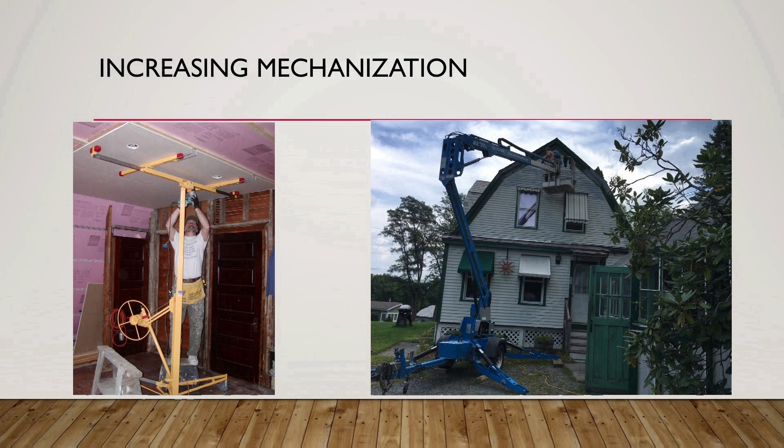And then, a couple years ago, I used a lift for the first time, right? Totally changes the way you work. No more setting up boxes, no more ladders, no more pump staging. You know, when you get up on a lift like that, you can have your entire shop up there with you. And it's just amazing. And this is common. It used to be pretty rare to see lifts on job sites, but it's mechanization. But that's not really what we're talking about, because we're not talking about today or tomorrow.

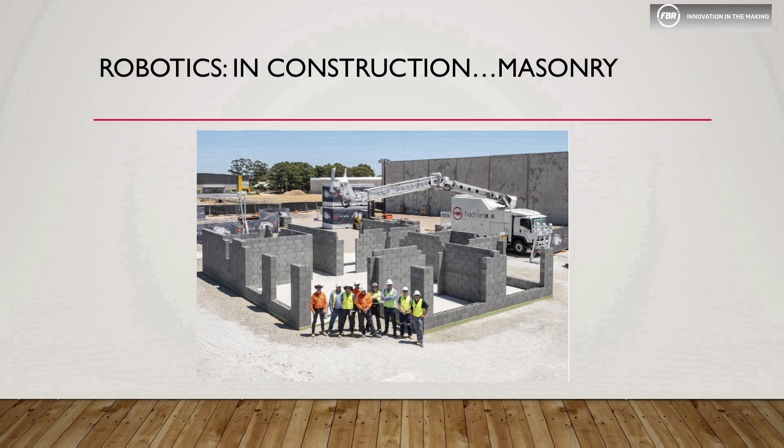We're talking about 2039. So this is a company out of Perth, Australia, FBR. They started in 1994 to work on how to lay any type of masonry with a computer. And their latest version is this one here, Hadrian X, which does just that. And it is Perth, Australia. Like, what the hell does it have to do with us here in New England? But there's a particular reason why they've been working on this since 1994, which we'll get to in just a moment. But it's highly mechanized and can lay out an entire building strictly from robotics, which are mechanical systems driven by computers.

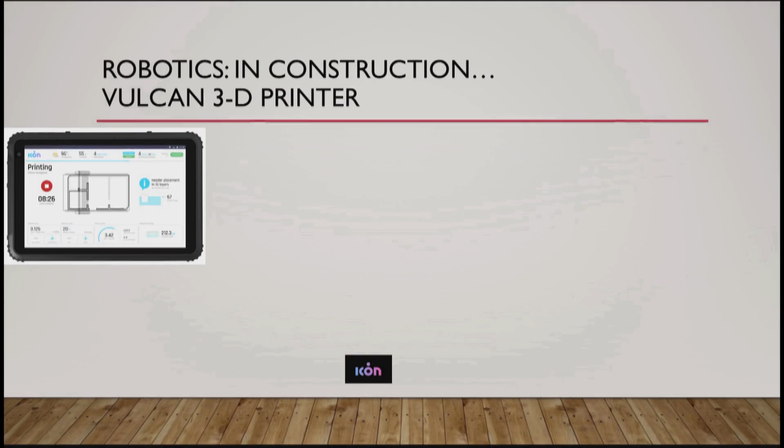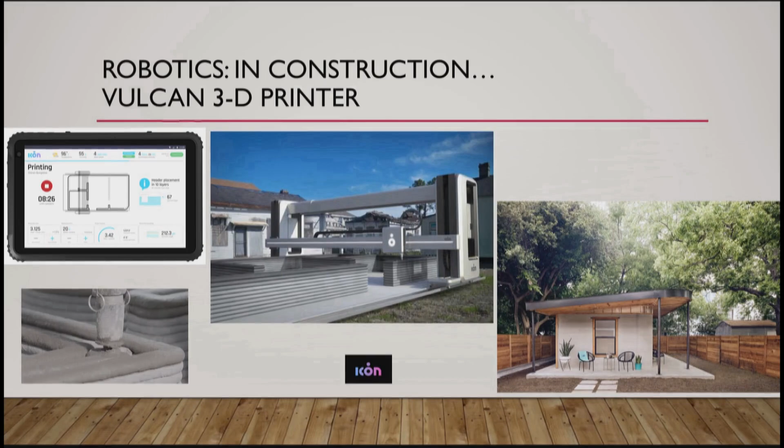So robotics also can involve a 3D printer. So I don't know if you're familiar with this company, Icon, but that's an iPad driving a 3D printer for a cement slurry. You can say, holy crap, where are they going to build that? Well, it turns out that's Austin, Texas. And that was the first permitted home built with a 3D printer. Now, we could have a lot of discussion about the building science of these types of construction, and we will, but in milder climates, these systems are taking hold.

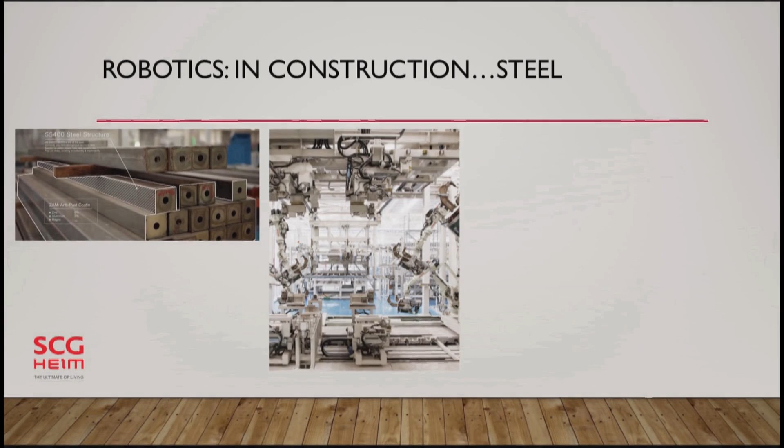So we got concrete and masonry blocks. What about in steel? Well, this company, SCG Heim, uses structural steel with this type of an assembly system, an awful lot like an automobile, and they build homes that look like this. This is in central Thailand. Also probably not terribly relevant to New England, but totally driven by robots, and there's a reason for this.

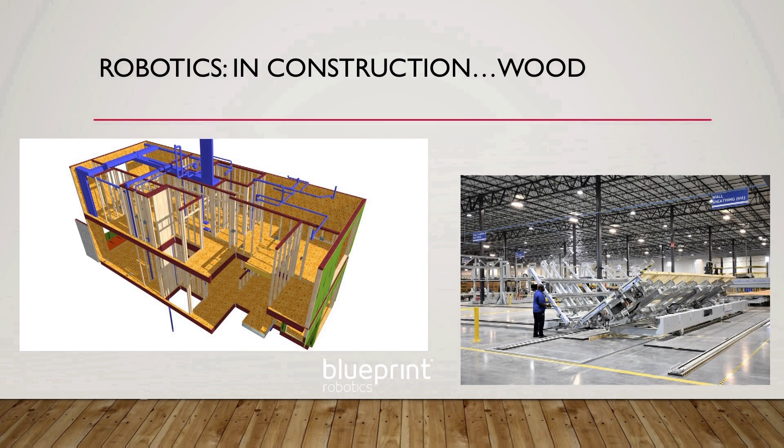A little bit closer to home, how many people are familiar with Blueprint? So this is a company out of Baltimore, and you send them your plans or your architect's plans, and they drive it through their factory process and deliver a final product to the job site that's sort of panelized. You have a highly trained crew build it, but then they come back at the end to basically wire and plumb the entire house. So they're involved really substantially at the beginning of the process in a giant factory in Baltimore, but then they come back and complete the process with quality driving this.

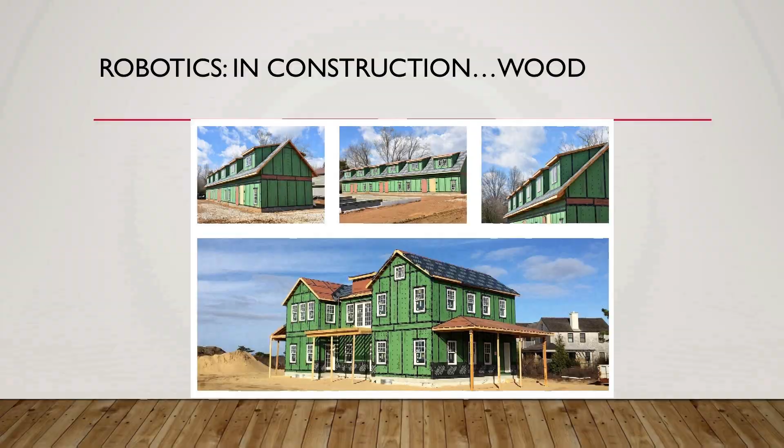This is all about what can happen in a factory as compared to what happens on job sites. And I'm showing this slide because when you go to projects on their website, they're all ZIP projects. So that's kind of interesting because as a system-built company, they went looking for a system-built exterior wall system. Now, full disclosure, I do a lot of work for Huber. And so I called them and I said, hey, you guys are involved with Blueprint. And there was some hesitation.

They said, yeah, but one of the advantages of a plant like ours that does continuous board generation is we can cut them to any length we want. The problem is that if the plans don't come from within Blueprint, but they're coming from people and architects all over the place, they're not modularized plans, right? So they're asking Huber for all these incredibly esoteric lengths, which sort of defeats the whole purpose of being in a factory, right?

So we have had modular and panelized homes for over 50 years, right? In central Pennsylvania, there have been companies doing modular, and one of the big problems is how do you create something that's modular but also has a custom feel to it? And I think there's an inherent problem with people who are used to site-built construction driving the decision-making process about how to move to robotic systems or to modular.

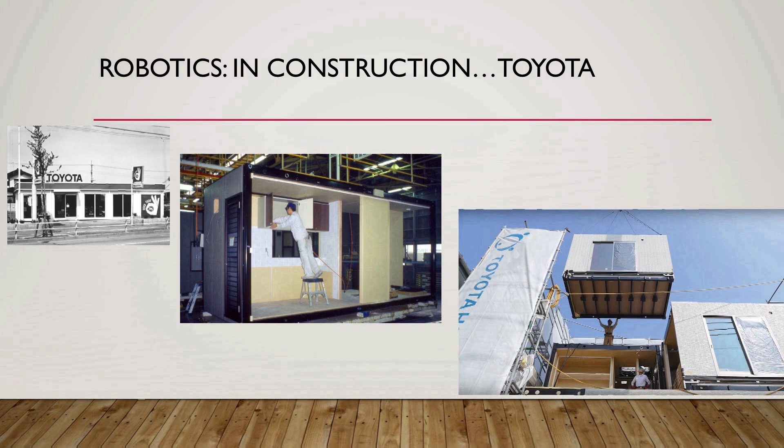So that brings us to the next thing, which is, well, wait a minute. Are there people who really know how to do factory production that are involved in home building? Well, Toyota has been building homes since 1975. In fact, some of their first locations in the US that sold homes, they sold them out of their automobile showrooms, right? Apparently not terribly successfully, but they know how to drive a process where you modularize everything, right? You create systems within a factory that give you the units you need, and then you plop them together. And again, we can have a discussion about the building science here, but this is where we're moving, and there's got to be a driver for it.

Honda builds homes in the US. They're taking a slightly different approach. This is Davis, California. Anybody familiar with the Honda Smart Home? And they're sort of going the opposite way of Toyota. They're taking their system of production and trying to figure out how to fit it with site-built construction. So it's sort of the reverse approach that Toyota is taking. And here's the house that they've built.

Tons of research. I have a little bit of a question here about their architect and the water management right about there. And these pop-outs are also sort of willy-nilly. I'm not an architect, but I expected Steve to jump out of his skin when he saw these. But the other big thing is the battery systems in cars we know are going to be connected to the battery systems in the house, and we're going to have this connection between the battery systems and the vehicle and the home in a way we've never had before.

And there's a guy named Michael Koenig. I don't know if any of you know his name, but he's the head honcho at Honda Smart Home. And he's been at Joe Lstiburek's summer camp. He's been working really hard to try to figure out how to move these buildings from climate to climate. Because that's the other thing, is you can move cars from climate to climate.

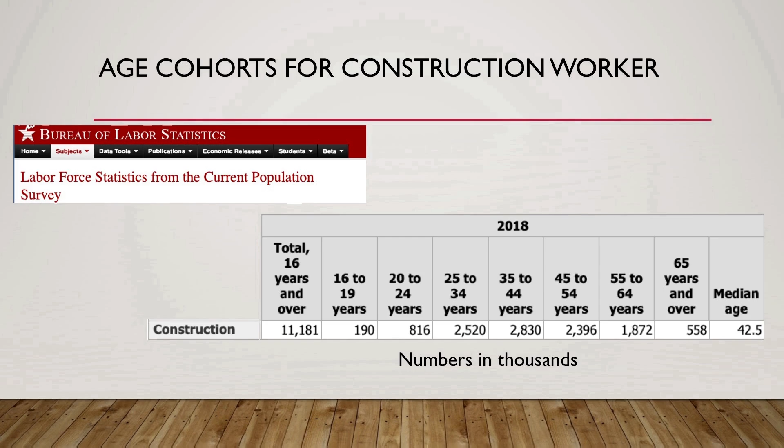The median age across all construction is 42.5. That is a recipe for robotics, right? Because that's how we're going to get them built. This is from NAHB, Eye on Housing. These are different construction trades. This is the median age.

Electricians, 40. Masons, 41. Plumbers, 42. Carpenters, 42. Site supers, 47. And inspectors, it doesn't matter if it's a building inspector or any type of inspector, 52. And nothing coming up in the pipeline.

Here's the real tragedy, is that even in the high-paying trade jobs on the commercial side of our business, we don't have anybody going into those programs. All the kids are going into college because that's where they think the money is. So this fellow right here, who is kind of the focus of this article, he is making $62,000 a year while he goes to school to raise his income up to $82,000 a year.

And yet we don't have people entering the trades, even when they're going to get paid that kind of money. So there's a huge disconnect between the labor that we need and the people that are going into the trades, even when we have really good pay. So that's what's driving this, is that everybody's going to be moving to mechanization because we got to figure out a different way to do it. People aren't interested in coming into the trades, at least not in the numbers that we need.

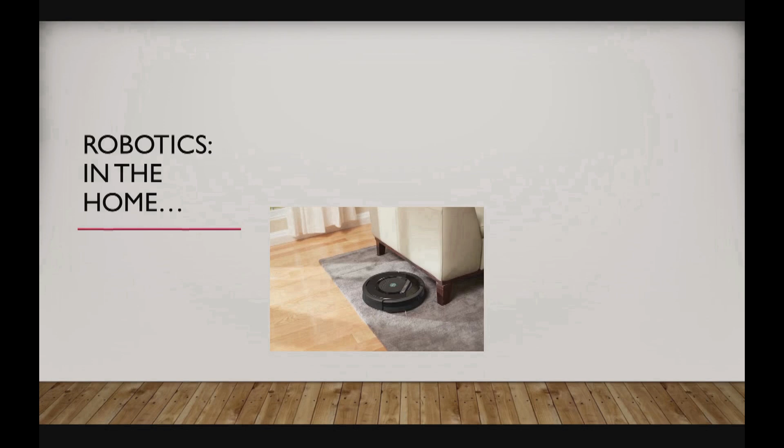So this is not a big surprise to you. We have all these robotics that are developing inside the home. This is the Roomba, right, which is the vacuum cleaner. This is called Leka. Leka is an interactive computer robot for autistic children. This is Home Patrol. So this unit is connected to your smartphone. So the camera moves based on how you direct it from wherever you are. So it's a moving security system.

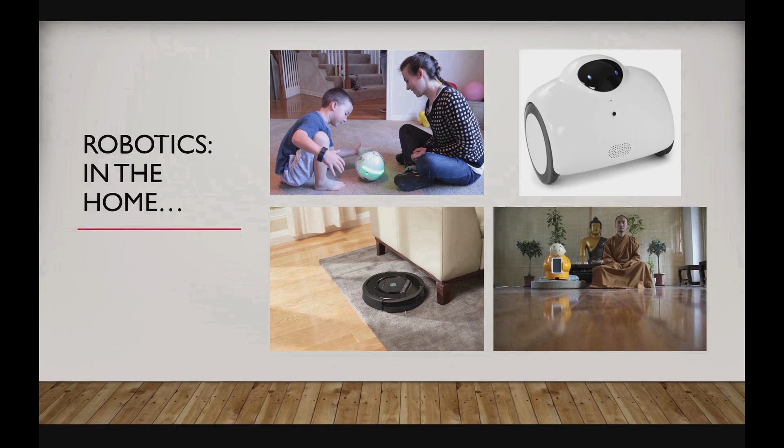This is my personal favorite. This is Xian'er, and Xian'er is a spiritual advisor who is a robot. I don't know what these people are drinking, but it's better than what we have.

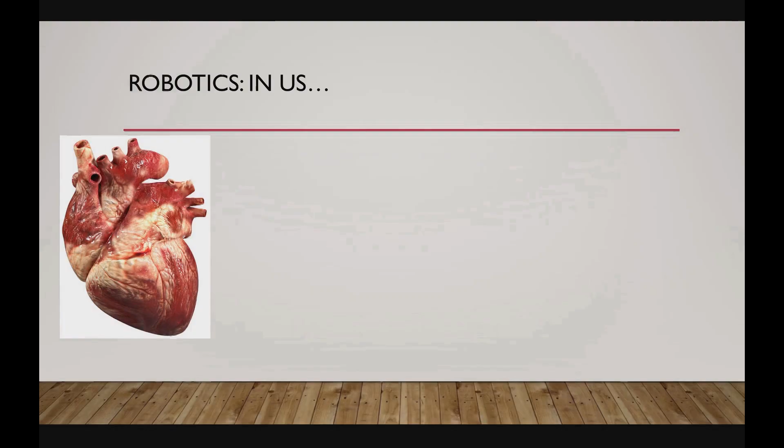But this is where it gets kind of interesting and also a little scary. That's a human heart. Since the 80s, we've been trying to figure out how to make an artificial heart. And this is 2015. This is Stan Larkin. He doesn't have a heart. He's wearing the backpack that powers the pump that's installed in the middle of his chest. And right now, these artificial hearts are an interim solution for people who can't get a transplant.

It's a really interesting article about this fellow because he should have been dead 3 or 4 times over. But he actually has had a heart transplant, but it was after 6 to 8 months, I forget exactly how long, where he was working with this heart that weighed about 3 or 4 times more than a human heart, and that was powered by a compressor pump, essentially, that was moving it through his body.

Now, well, that's a little bit extreme. Probably all of us know someone, or have contact with somebody, who has had a pacemaker, right?

And that valve, if that person doesn't die of a heart attack, when they die, they have to turn it off because it just keeps pumping blood, right? So we're moving into a stage where it's not just the robotics on the outside, it's the robotics on the inside. You can say, well, what the hell does that have to do with where home building is going?

So this is my friend Jim Ewing here. I used to teach a class when I taught high school called Outdoor Learning, and he was one of my students. I taught him how to rock climb, and then he went on to be a really accomplished climber, became an engineer for Sterling Rope, which is up in Portland, Maine. And that's Larry Hamilton, who was sort of a mentor to both of us.

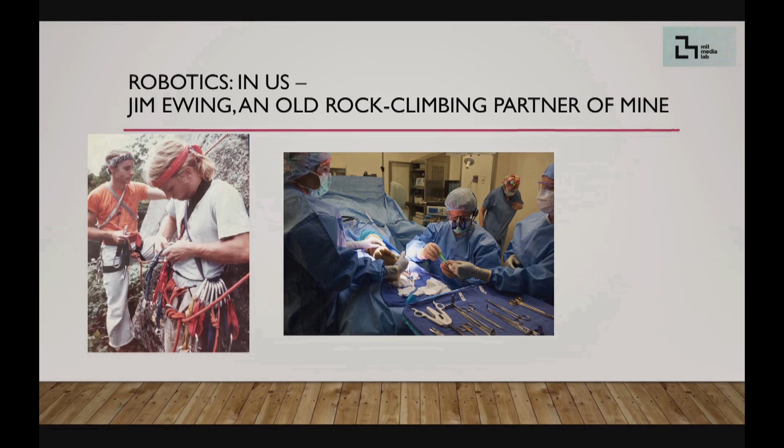And it was a miracle that they got him out of the Grand Cayman Islands on a medevac helicopter to keep him alive. But here, he's having his left leg amputated, just below the knee. And he's having it amputated because he doesn't have enough function. It's not dead, but it's pretty close to it. And the really interesting thing about this is that a lot of the work that's being done on robotic prosthetics is out of, you'll see up in the corner, MIT lab.

One of the primary drivers of robotics for human parts is a guy named Hugh Herr. Does anybody recognize that name who might be in the building community? Hugh Herr was a cocky Western climber who came to New England, went up on Mount Washington because it was only 6,288 feet, proceeded to get lost in the winter and lost both of his feet to frostbite. And Albert Dow, who was a climbing instructor in North Conway, died in an avalanche looking for Hugh Herr. So the climbing community has a very kind of torn thing about Hugh Herr.

Hugh Herr went on to become an engineer at MIT and did some of the first work on the prosthetic that Jim's going to be accepting. But here's the really cool thing. When they cut his leg off below the knee, they took all of the tendons, the muscles, and the nerves and tied them together just below the place where he was amputated.

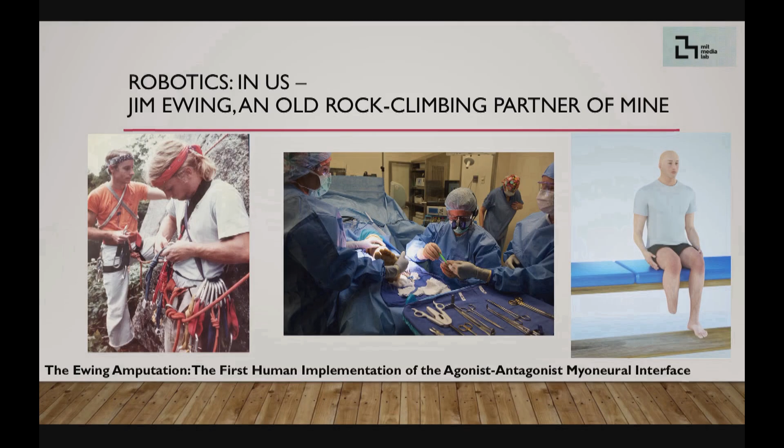And it's called the Ewing amputation, after Jim Ewing. And it's called the agonist-antagonist myoneural interface. And what that means is that they took all the muscles and nerves that push and pull at different times to move every part of your ankle and your foot. So I'm going to show you this video.

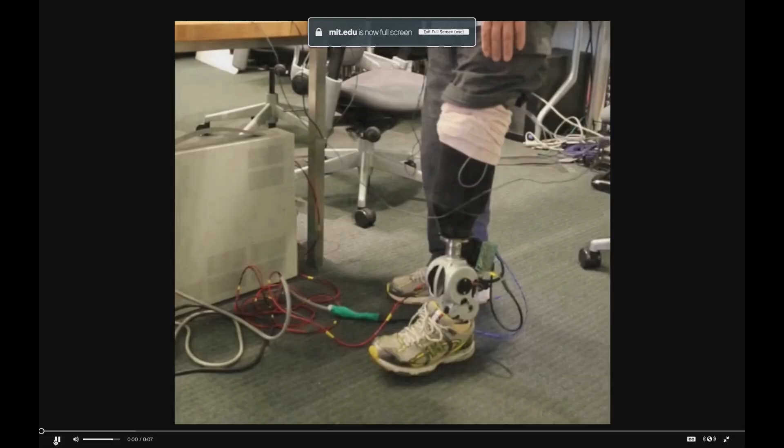So I just want to show you this little ditty on the side. Jim's got a roll of tape stuck on the bottom of his foot, and he shakes it off just like you would. And that's all because they were able to take all those nerves, tendons, and muscles and connect them to a bionic leg underneath. Jim can walk with his eyes closed because he feels through those nerves where his foot is, right? This is really going to change everything about the way that we use robotics.

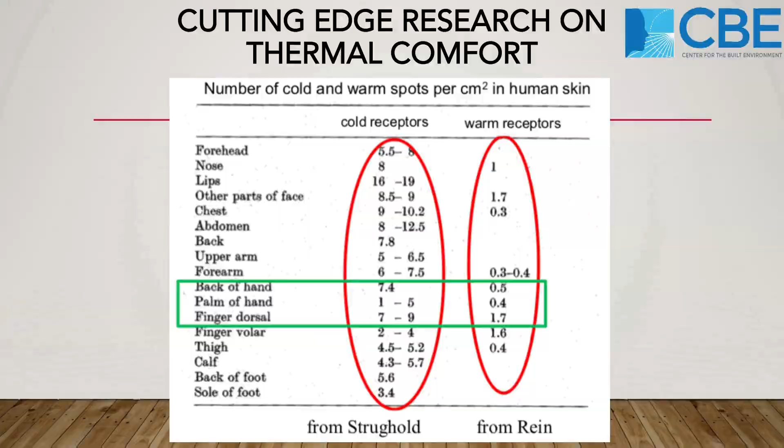And this is driven by really accurate tracking of the number of cold and warm receptors in different parts of your body. And what that means is that if we know where people have more cold and more warm sensors, we can target the thermal comfort for those areas in a way that we can not just target people, we can target parts of their bodies that are sort of telltale for thermal comfort. So how do you do that? Well, you get people to wear something like this.

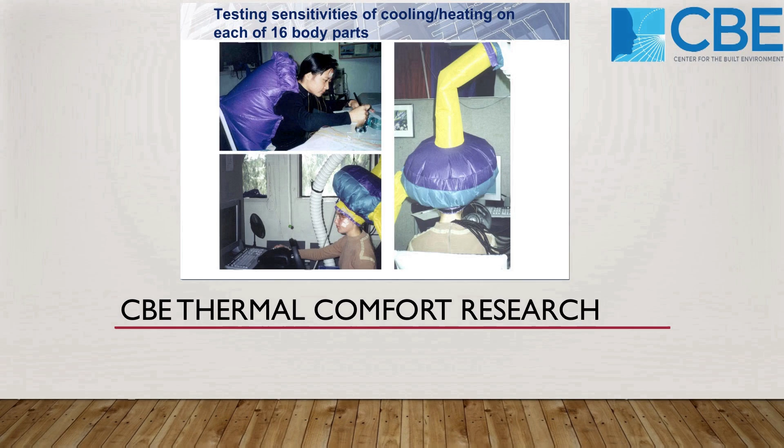And this is how we know that there are certain places on your body that we can deliver cool to, and it'll keep your whole body comfortable as compared to heating your whole body or the whole building.

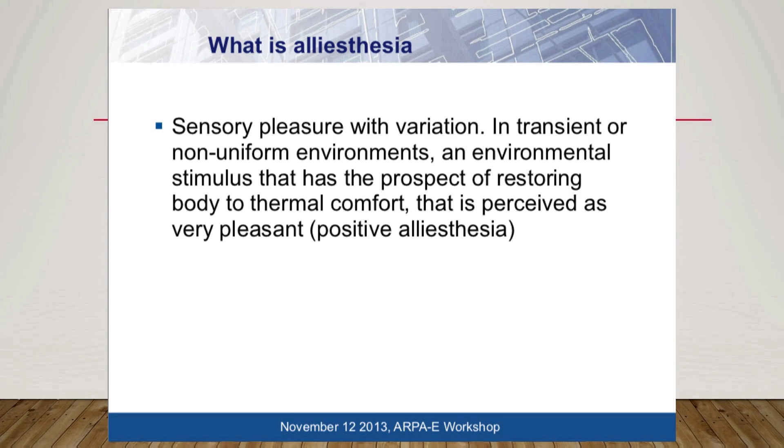And the other thing they've discovered as part of this research is this phenomenon called alliesthesia. And so the alliesthesia principle is that people experience greater thermal comfort when there's variation in the environment rather than steady state. And so all of our mechanical engineers are trying to deliver steady state, which even on the best day only gives 80% satisfaction.

And the way that you really keep people on their toes, particularly when they're working, is you have to vary the environment, because it's the changes of the environment that keep us happy and thermally comfortable. And so this is the problem, that we're shooting for these isothermal neutral environments, and actually what they have discovered is that if you change the environment, people are generally happier than in a stable environment.

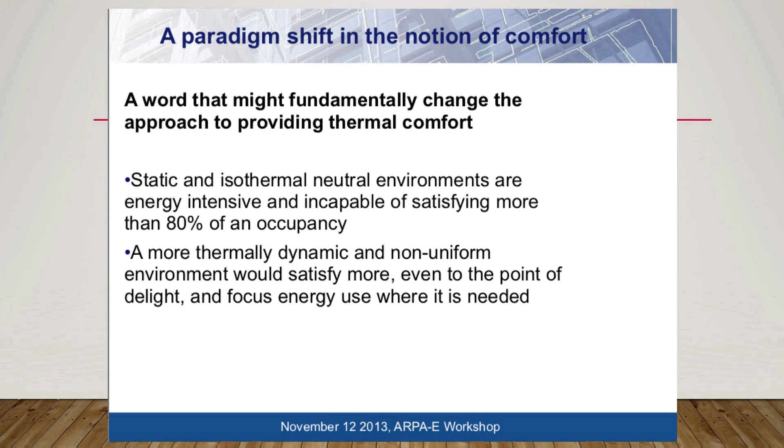So the whole idea here is your feet are incredibly sensitive to particularly cold. If we have activators for very low wattage fans underneath the seat.

Is that a hot seat? Well, not when you're moving cold air. Was that a joke? I do know that you're paying attention, Steve.

So I can deliver either heat or coolth, depending upon what's accompanying the fan movement. But here's the really interesting part. So we have 3 different cities. And so 20 degrees is about 68 degrees Fahrenheit, 22 is 72 degrees Fahrenheit, and 24 is 75 degrees Fahrenheit. And what we can do is we can create a dead band in the building, right, and deliver to individuals rather than the space.

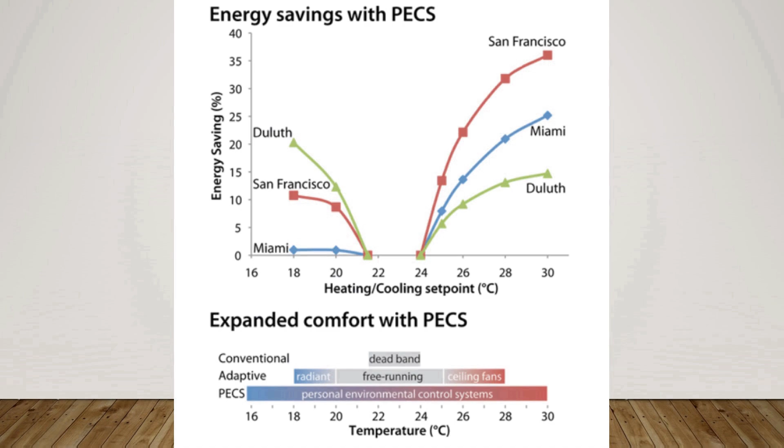So the environmental temperature of the building goes either down in the winter or up in the summer. And you can get up to 20 to 30% savings by that. And then what you do is you heat and cool the people. And so you basically increase the dead band and then deliver the thermal comfort to the individuals.

And so 20 years ago, we didn't have 2-watt fans that we could use to power some of these stations. And so you basically have hand warmers, foot warmers, and warm or cool for your face, your hands, and your feet. And then you wire them all together in an internet system. And this is being done in commercial settings. The automotive industry is working on this, but it also can be applied to residential.

And so we have had task heating, right? This is a kotatsu, which is really common in Japan, that you just heat the workstation, right? So I'm convinced that if we combine the spacesuit, which is there to activate and support our muscle systems, we're going to have the same thing for heating and cooling, right? We're going to be wearing spacesuits that are delivering to those sensors. And you could say, really, in 20 years? All this stuff was not available 20 years ago.

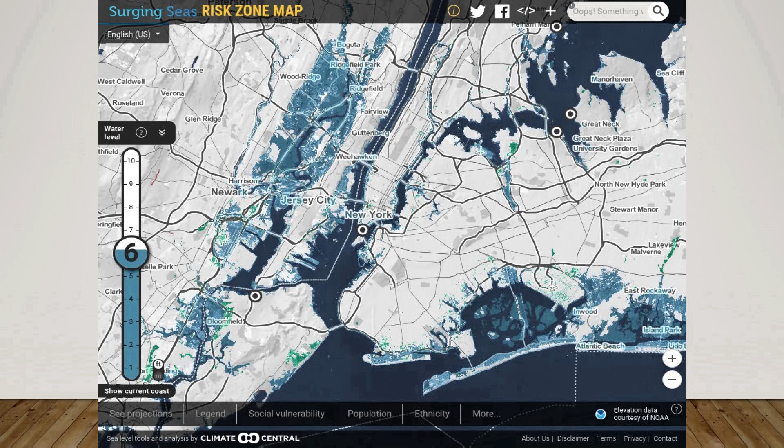This is a map pretty close to where we are. This is Jersey City, this is Long Island, this is New York. And if you look at a 6-foot level sea rise, which is associated with, say, a 1.5 degrees Celsius, there's just all this land that is going to have to either go underwater or we're going to have to become more like Amsterdam, right? So this is a pretty cool tool because you can go in and for any place in the United States, pull up the risk zone map. And we're seeing this. We're not going to be able to build homes if this is where they're going to end up.

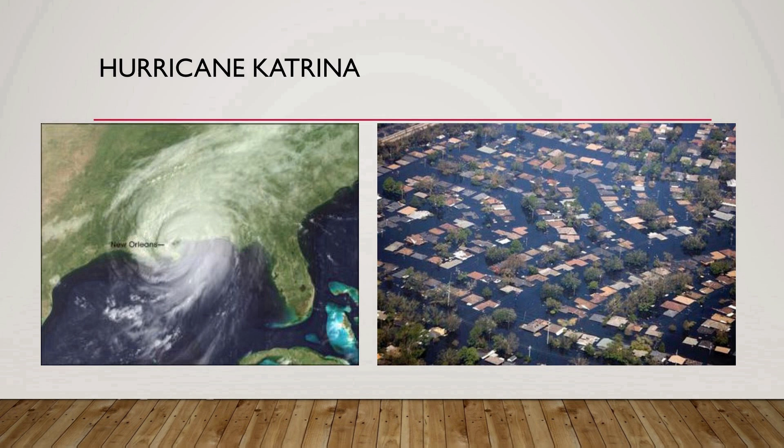So number 4, future possibilities, according to Darrell West, is, well, what happens if Europe turns right and undermines democracy? Because we're part of a global economy, so we're really dependent on the democratic institutions in a large part of the industrialized world. But, you know, look at what's happening.

The Swiss People's Party, which is, you know, a far right ultranationalist party, got 29% of the vote in the last elections. Austria, Freedom Party, 26% of the vote. Danish People's Party, 21%. France National Front, 13%. And Hungary, the Fidesz National Party, won 49% of the vote. So this is potentially incredibly disruptive to the way that we do our economic systems across the globe, to which we're tied.

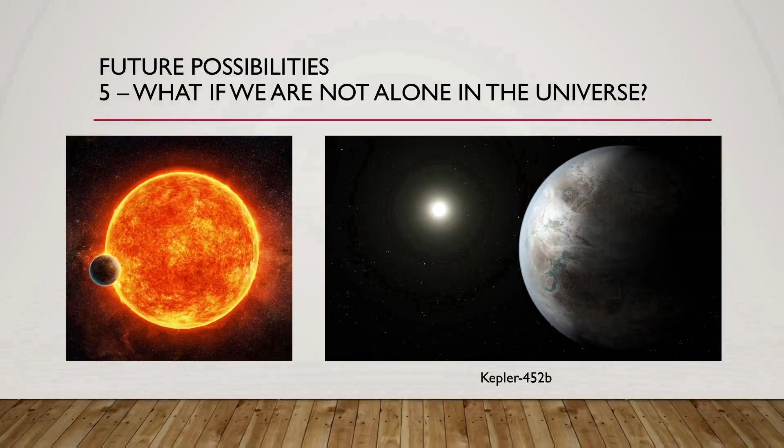And the only thing that life needs is water. That's the defining ingredient. And you can think that this is off 20 years. I pulled this off the internet yesterday. So this is the chief scientist with NASA saying, we are going to find life on Mars because there is liquid water underneath some of the frozen stuff that we see at the surface. And if there's water there, we're going to find microbes. And he says, yeah, that's okay, but we're not ready for that yet. So what does that mean?

It means that a lot of us, maybe all of us, that's an existential, we'll probably have to go back and talk to that robot, Jean, right? Because, Jean, what do I do if there's more than life on Earth, right? So this is incredibly disruptive to a culture and for a lot of people, religions that are totally based on us being the main point of it all.

So the thing that we're going to have to struggle with is that if we have these major changes that we think have high probability, the really important question is, well, do they create common cause or chaos, right? So have we had examples where incredibly disruptive events came about, but we had common cause as opposed to chaos? Well, sure we did. I mean, think about at the end of World War I. There was no World War I, right? There was the Great War because they didn't know there was going to be a World War II, right? So it was the Great War.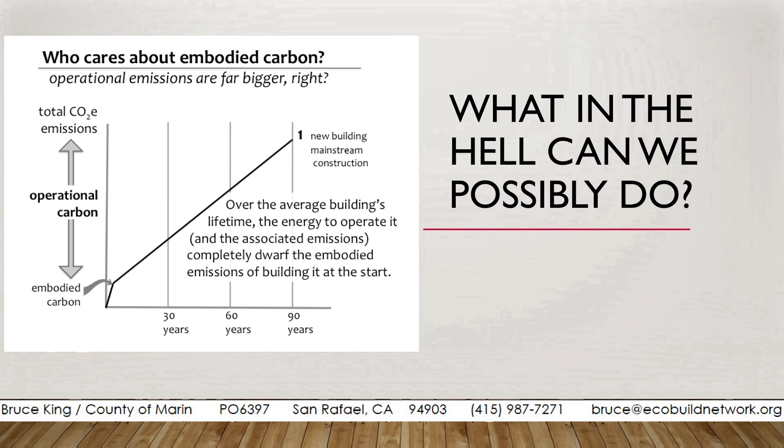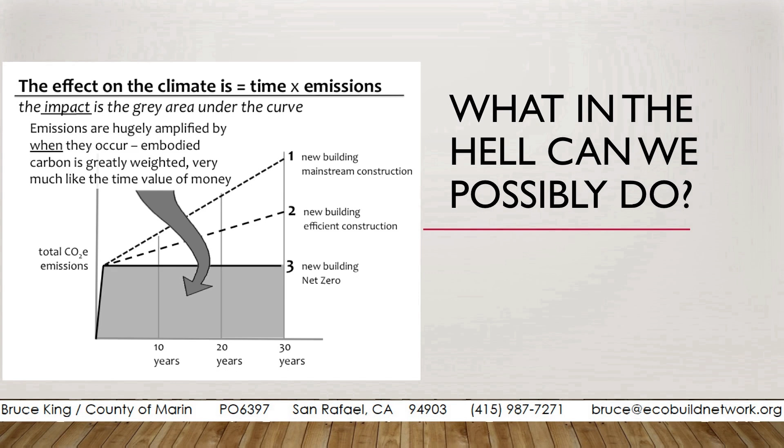So the problem is, even if we start to build net zero buildings, we still have this huge block, the gray block underneath here, that in the next 30 years is going to be the difference between 600 parts per million of carbon dioxide in our air rather than the 350 that we need to pull it down to. So Bruce's position on this is we can't just pull our operational energy down to zero. We've got to work on this part of the footprint, which is incurred in the materials that we build with. That's uplifting.

So in Marin County and the Greater Bay Area, there are several, I mean, how many of you have ever gone to a ready-mix concrete plant? Bunch of hands go up, right? Like if you were looking for the most liberal people in your town, you probably wouldn't start with the ready-mix company, right? I mean, no offense, they're great guys and gals.

So I just have this image in my head of Bruce King, a former arm-farting Buddhist monk, going into Central Concrete and saying, hey, I'm Bruce King, I'm a licensed professional engineer. You need to change the environmental footprint of your concrete in your ready-mix operations, right? Well, you can imagine how that went, right?

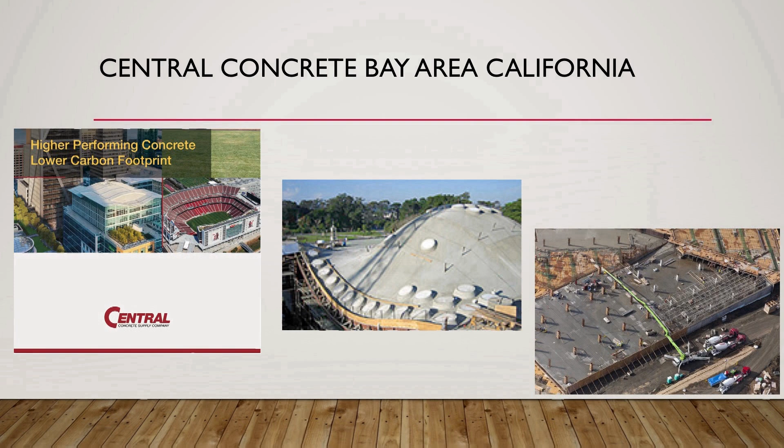Well, it turns out Central Concrete has, if you go to their website, a whole system of reducing the impact of concrete using the flow chart that Bruce King built, and they are now using, including on their website, a mix selector that allows any architect or engineer to go in and dial the different environmental impacts of all the materials in concrete to pull it down. So they know what mix to use.

Now you can imagine if you go to a ready-mix plant, they only have one bin for Portland cement. If you're going to have Portland cement substitutes, you're going to have like 5 bins. So this is complicated engineering that we need to do to decrease the environmental footprint of the concrete. But it's being done.

Why? Because Bruce walked in as a structural engineer Buddhist monk to Central Concrete and convinced them that this is what they should do. And actually, it's part of their business model now. They are getting spec'd more in the Bay Area because of their environmental emphasis.

The other thing I think that we're going to have to change is design for disassembly. Now here's the thing. Every single weather-resistant barrier and air barrier that we build is dependent on sticky stuff. And sticky stuff makes it harder to take things apart. So we have this tension between high-performance buildings from a hygrothermal perspective and design for disassembly.

So Steve is one of my favorite architects in no small part because I've seen Steve just take something like, okay, I'm a builder in the Southwest, and my number one complaint from my customers is I can't get hot water in my master bath. Why is that? Well, because every home built in New Mexico is on a slab, and that means all the piping's in the slab, and they've tried insulating it, and then the concrete guys come in and they rip the shit out of all the insulation around there, and they just cannot get hot water through that slab.

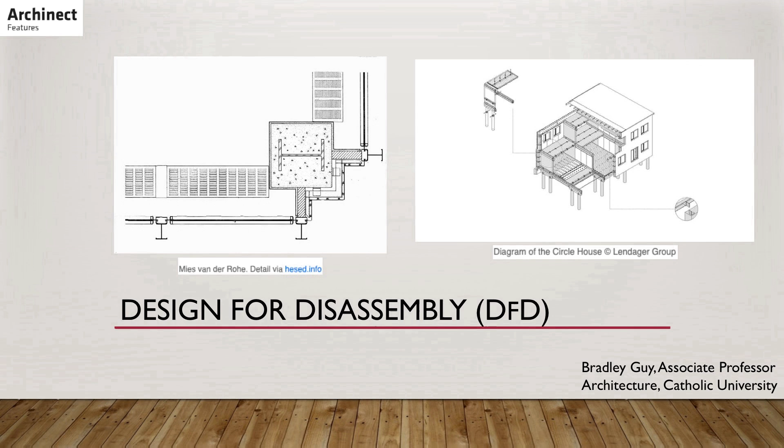So now what we have to add is a new design constraint, because if we design for disassembly, we can take that huge environmental gray box, right, the embodied energy, and if you take that sunk cost and you move it into the next building, you're protecting that embodied carbon investment. And by the way, Bradley Guy is a professor at Catholic University who is largely responsible for a lot of the early work that was done. This is also sometimes called design for deconstruction. And there's a manual for design for deconstruction.

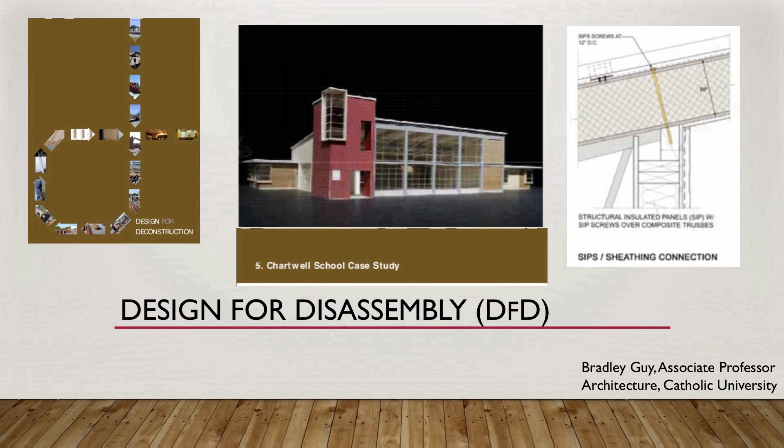There's a Chartwell School out in California that was built as an early case study. And interestingly, they picked structural insulated panels for the roof system. Now, wait a minute. There's a lot of sticky stuff that made that SIP panel, right? Well, it's the panel that you take apart, right? And reuse that. So you can use sticky stuff. You just have to have a way of putting those panels together in a way that you can deconstruct them.

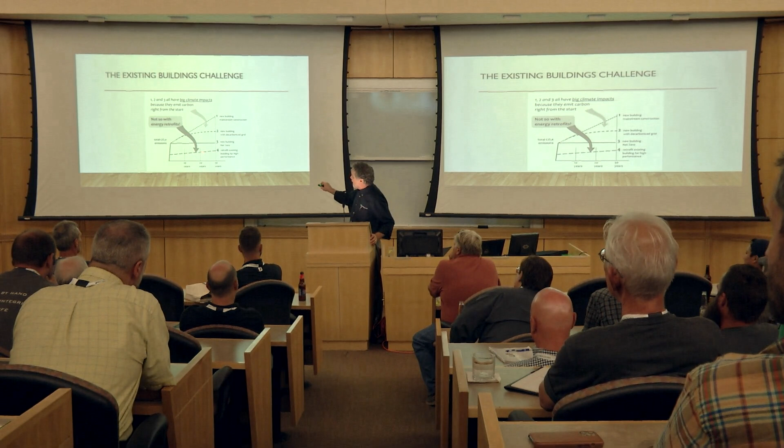Well, that just takes care of the new buildings. We have way more existing buildings than we ever make. We have like 115 million existing dwelling units, and we build 1.5 million each year. So the 800-pound gorilla in the room is not new construction, it's renovation, right? And so in Bruce's diagram, well, look, if the environmental footprint of an existing building is smaller and it's sunk, right? It's gone, right? If I have a big church that's made out of concrete pillars, and there's a lot of embodied energy in them, well, that incurred a long time ago. It doesn't count as a sunk cost, right? So if we take those buildings and we drag them kicking and screaming and reduce their operational footprint, we've avoided this portion of the box.

So the big impact that we can have is by improving our existing building stock. We can't build our way out of this, we can renovate our way out of this. So, I wrote a blog for Green Building Advisor a couple weeks ago because AEROBARRIER is this new aerosol system, and they don't say that their franchisees can use their product system on existing buildings, but they're doing it anyway. And there's a guy in Utah who not only does AEROBARRIER on existing buildings, he does it on occupied buildings, right?

So think about it. If 25 to 40% of the energy in a building is air leakage, and we've got all these really old leaky buildings, what if we could, in 3 hours, take them from 14 ACH50 to 3, right? And all you got to do is tape everything off. You're like, how the hell do you do that? Well, the guy in Utah, he doesn't do it. He has a high-end painting firm, and they tape off everything anyway when they go inside of a building.

So they go in, they take everything out of the closet, they dump it on the bed, and they wrap the bed. They go in and they pull back the carpets, right? Installed carpet, 3 hours. They're done. 3 hours, AEROBARRIER comes in. 6 hours later, you've got a home that went from a complete dog to one of the hardest things, which is, you know, I have a 110-year-old house in Brattleboro. And I don't know what the ACH50 was when we started, but it was definitely above 10.

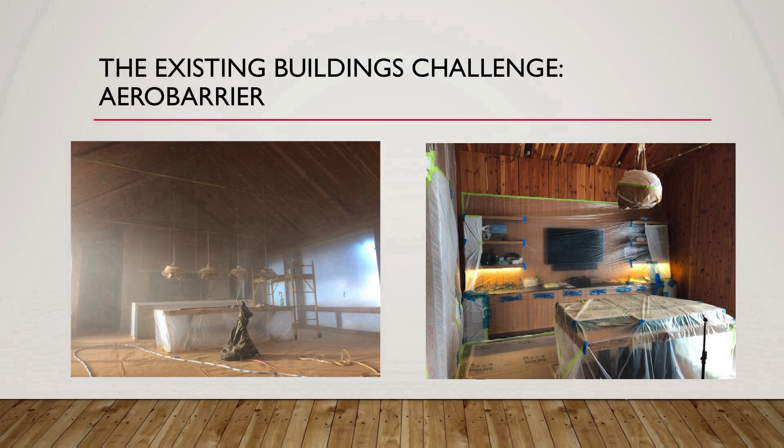And then we've got aerogel. So this is a patent that Miguel Gonzalez pulled from TAMLYN for an R12 aerogel house wrap. Right? So aerogel is when you make the spaces between the insulation material so tiny that you can get R10 in about 3/8 of an inch. And they call it frozen smoke. The air pockets are so incredibly tiny that that's the way you get the R value in that thin of

a layer. And so where is all the aerogel going? It's incredibly expensive, but what's driving up the price of aerogel? Well, every pipeline in a cold climate, the way that we keep it warm is we wrap it in aerogel. So all of the aerogel that's being produced is going into the fossil fuel industry right now. So Miguel is waiting for the production of aerogel to go up or the oil industry to crash so that there's enough available for him to make this, because he's already pulled the patent.

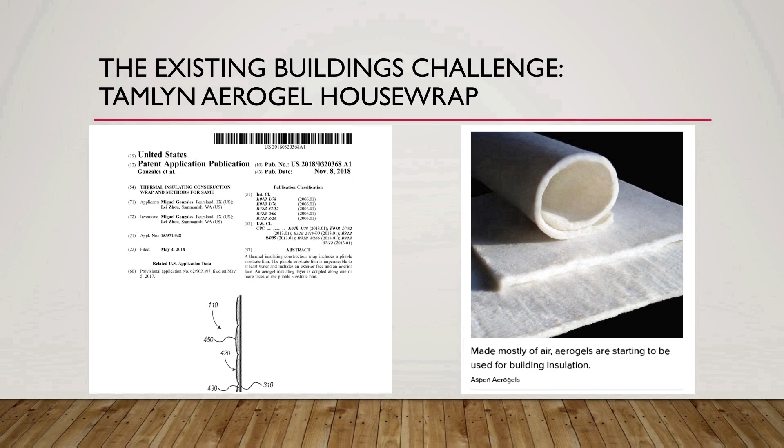And we already have Aspen Aerogels, Thermablok. These are companies that are making insulation. These two technologies paired up in existing buildings could completely change the performance of those 115 million units that we have that are currently energy dogs, but that can become high performance.